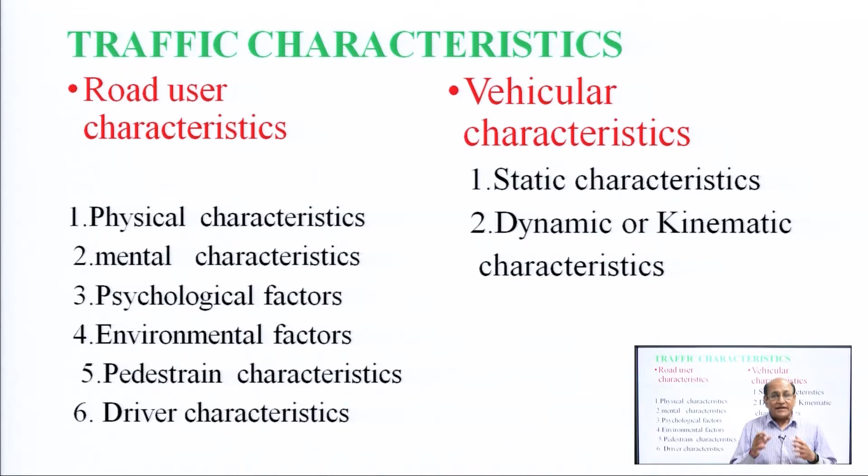In physical characteristic there are two types: one is permanent factors and another is temporary factors.

In permanent factors, the visual factor is important, because if the vision is not so good, it will continue for a longer time if not properly treated. Other permanent factors include hearing, strength, age, judgment and reaction response. Whereas in temporary factors, alcohol, fatigue, illness, anger, climate, season and time are the factors.

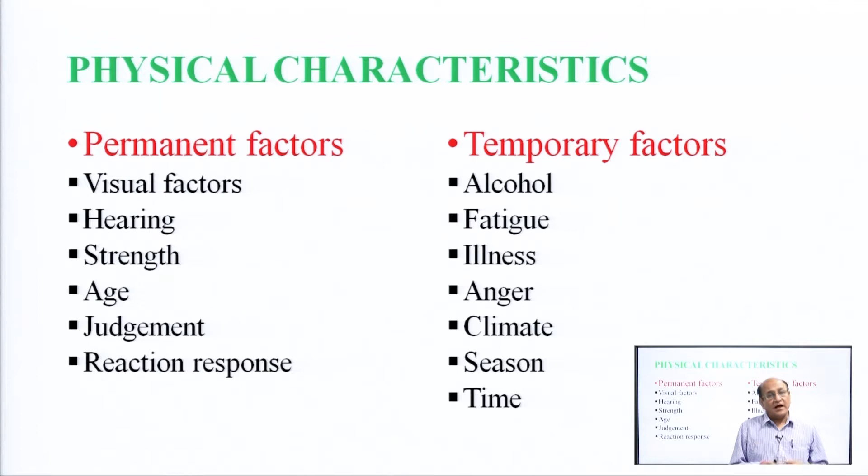So first of all we discuss vision. It affects the ability of the road user to detect objects, receive information and identify objects. This includes visual acuity or clearness of vision, and second is peripheral vision.

So we go through it, up to this is the cone angle of vision. Up to 3 to 5 degrees the vision is very clear, legend can be read within this cone. What is the cone? The cone is like this, you can see here.

Between 5 to 7 degrees the vision is clear and good vision. Then 10 to 12 degrees is satisfactory vision, where object shape and color can be identified. Beyond 12 degrees blur vision starts, meaning we cannot see the object properly, though movement of object can still be detected.

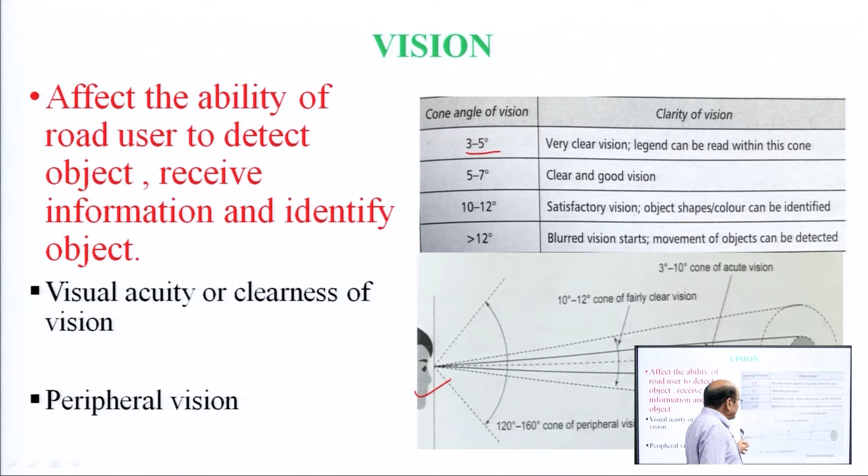Then come to peripheral vision. This is the eye and this is the cone. So we can see here, this is the range of 10 to 12 degree cone, that is fairly clear vision.

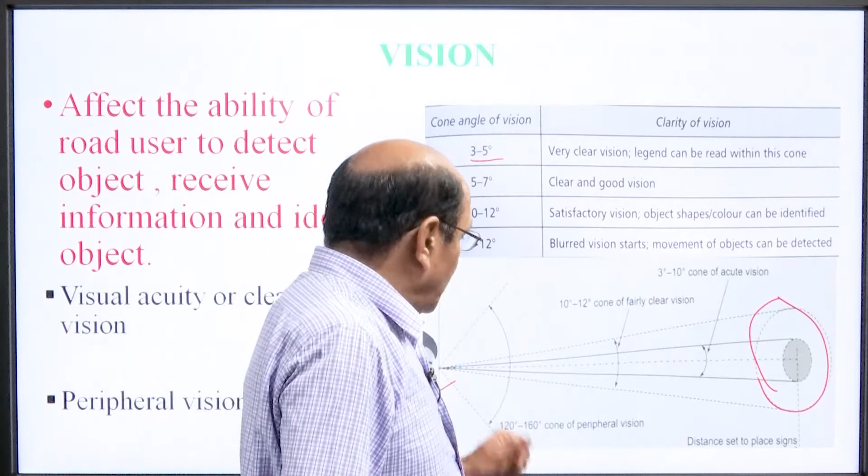This is the 3 to 10 degree cone of acute vision. So up to this, up to 10 to 12 degree cone of fairly clear vision, the object could be quite visible and there will be no problem at all. Beyond that, the problem starts and the object becomes blurred.

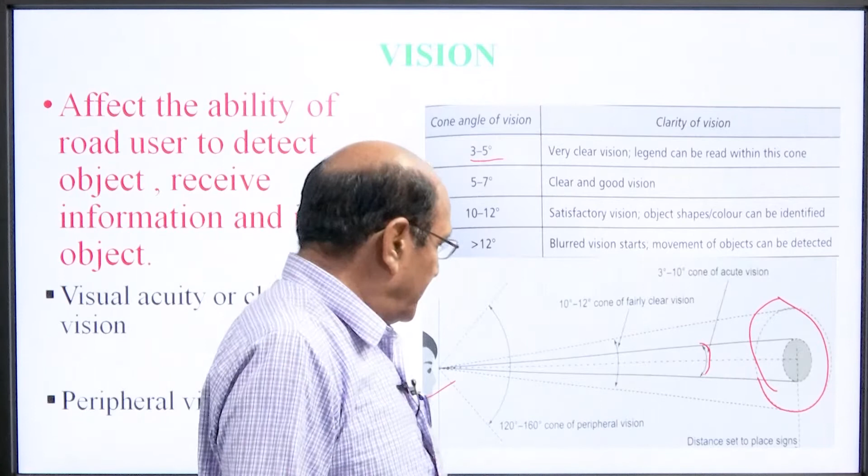So, eye movement and visual concentration, then color vision, glare vision and recovery. Once a vehicle is coming from the opposite side with a strong light, instantly the glare will stop the vision, and within a fraction of a second it is again recovered.

The perception of space means how much distance is there, what is the height - this could be the perception of space.

Hearing, because the rear vehicle will make a horn, so that could be easily heard. Then the vibration sense of touch - once it is touched, then that strength could be perceived.

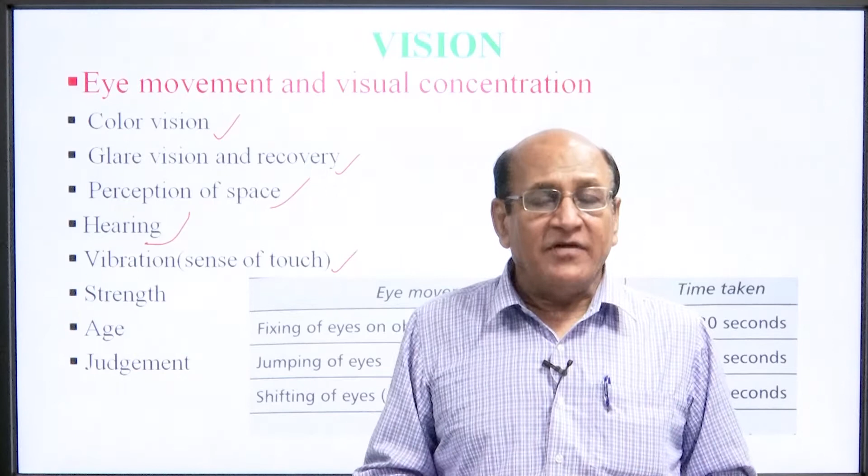Suppose a multi-axle vehicle is driven by a very thin person, he cannot move the vehicle during driving, because he has to work hard to rotate the steering. So strength is one of the important factors for the driver.

Age is also important, but the perception time or reaction time is very fast in the early age, before say 18, and after 50 the reaction time is very large. So age factor is also there, and then judgment.

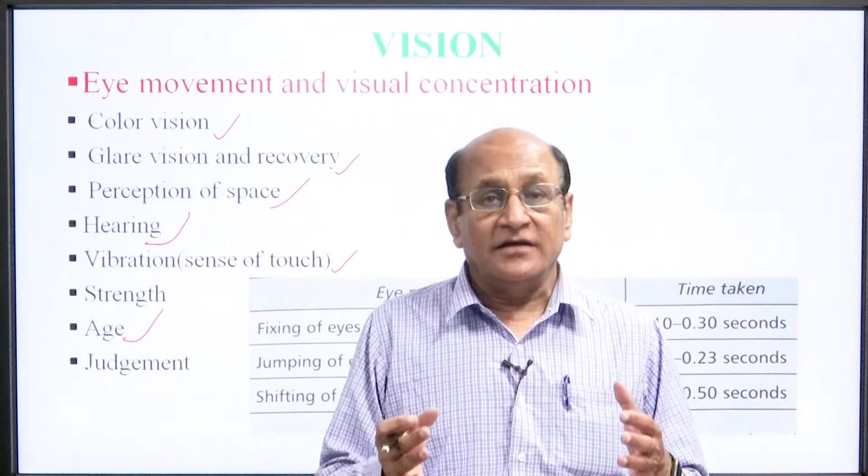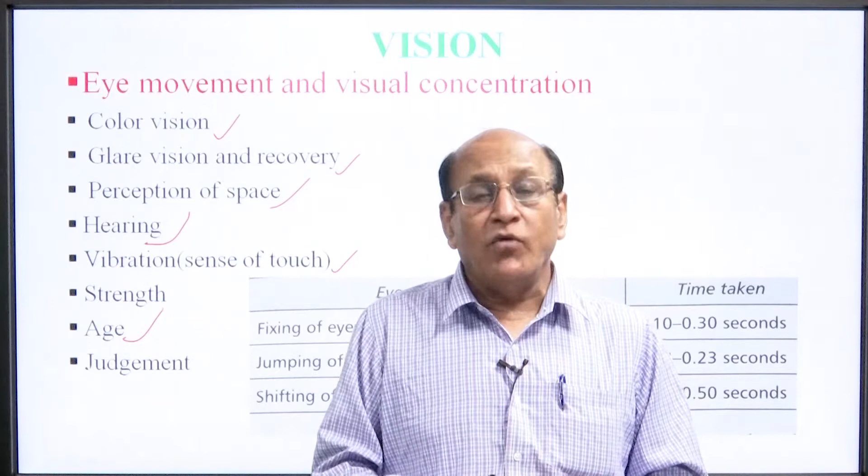This is an important factor with the driver, how he judges the space between two vehicles - he can judge and cross it, he can stop or maintain a regular distance between two vehicles even in the moving state.

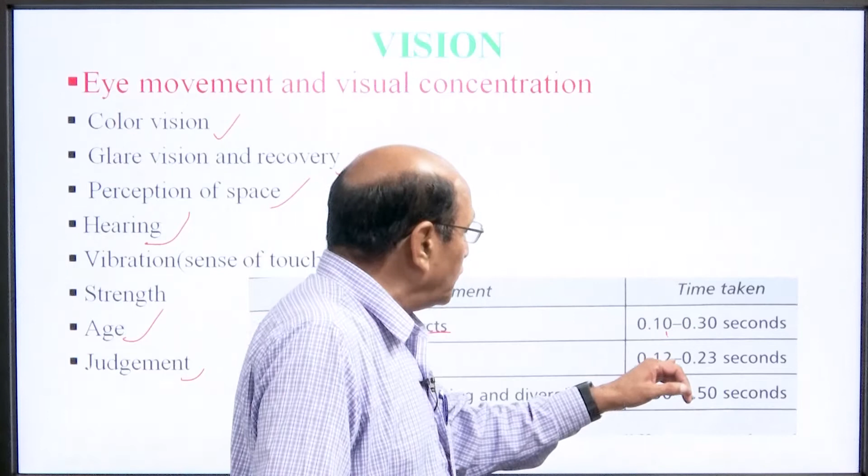Now come to eye movement. Fixing of eyes on an object takes 0.1 to 0.3 seconds. The jumping of eyes takes 0.12 to 0.23 seconds, and shifting of eyes, converging and diverging, takes 0.3 to 0.5 seconds - that is the time required for these.

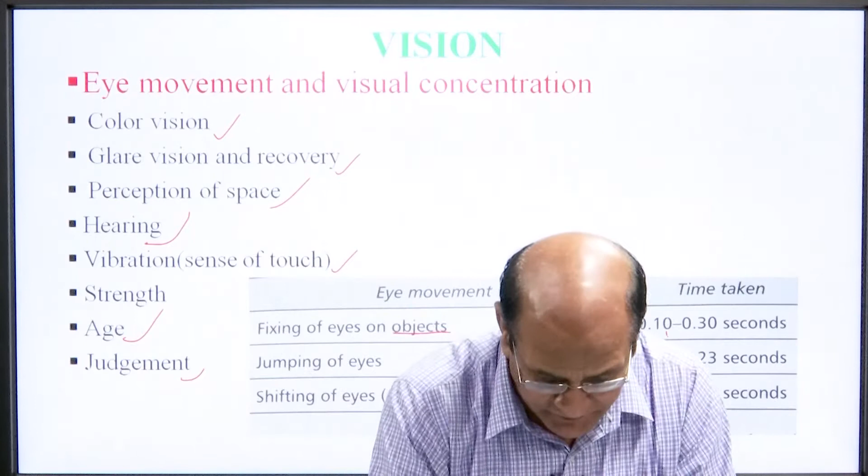Then come to the mental characteristic. Mental means the knowledge of the vehicle and the driving, skills, how is skill, intelligence should be there. So, can he take a decision properly, and literacy means he knows each and everything about the driving.

Then the psychological factors. The psychological factors include attentiveness, fear, anger, superstitious behavior, impatience, maturity, and general attitude towards traffic and regulation.

Driver should be quite attentive while driving a vehicle. Fear - suppose a vehicle, some person or a small boy is just crossing ahead of the vehicle. So he will feel fear, because there are chances of accident.

While crossing, he may get angry as to why the person has done so. Superstitious - suppose a cat is crossing the road, so he will stop the vehicle, and then after a few moments he will start the vehicle again. So this is the superstitious factor.

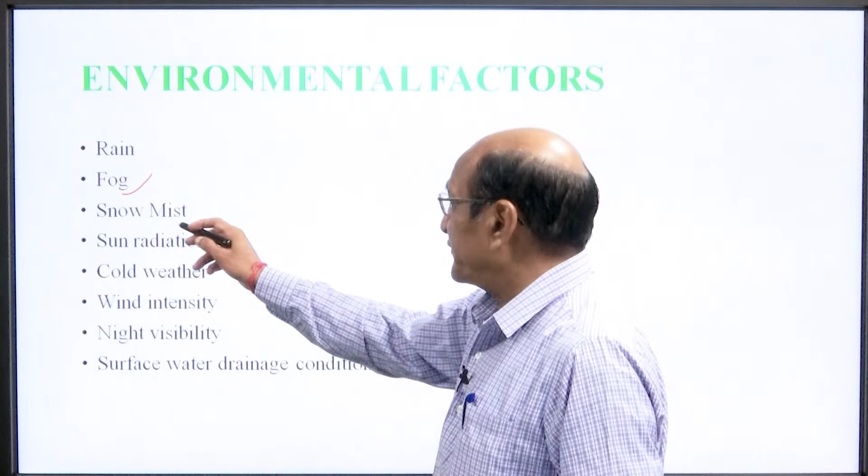Visibility becomes a very small distance. Snow and mist occur in the hilly regions, causing this problem. The sun radiation during the summer season is a predominant factor. Cold weather in the winter, when it is too cold, will also affect the driving.

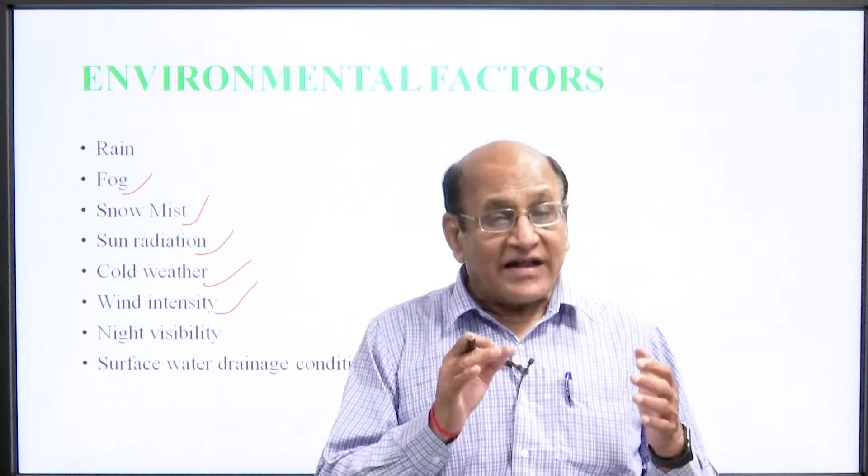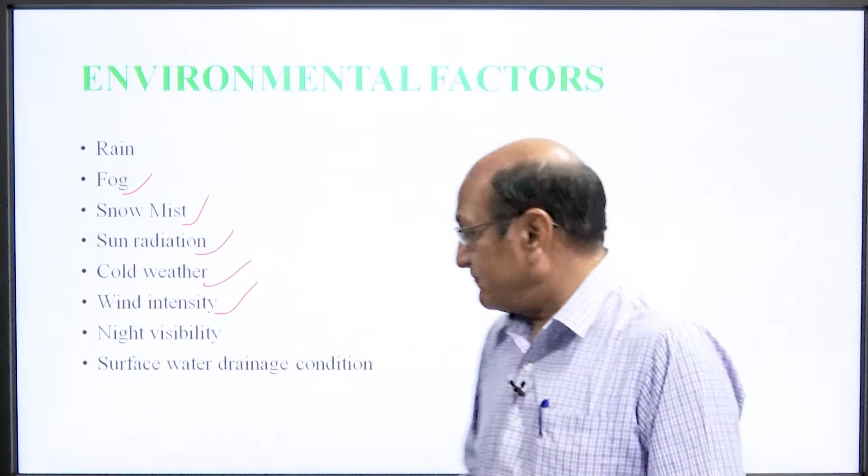Wind intensity - when the driver is driving and the speed of wind is too high, this will affect the driving skill of the driver. Night visibility - some have a problem with night visibility; when driving at night, they feel some difficulty. Surface drainage, the water drainage condition, will also affect the driving of the driver.

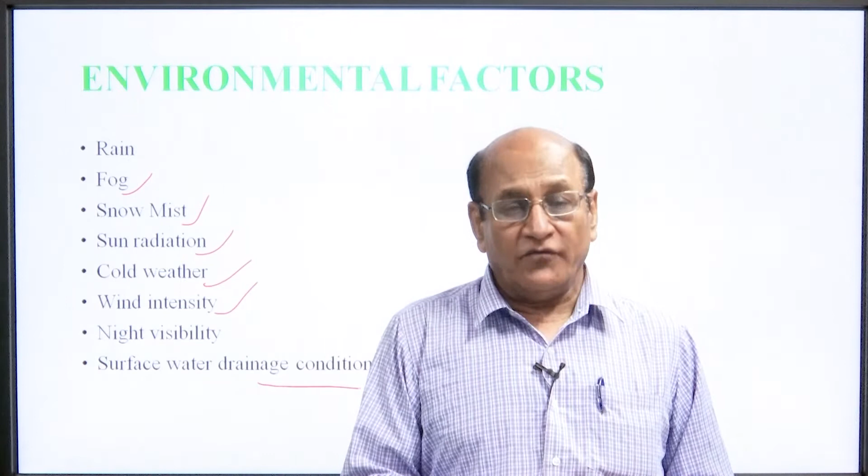Then the pedestrian characteristic. Walking speed is the most critical input parameter in the design of pedestrian crossings at cross sections.

85th percentile of walking speed is used for the design of signal timing at signalized intersections. The gap acceptance and the time gap accepting or rejecting behavior of pedestrians is considered in the design of unsignalized intersections.

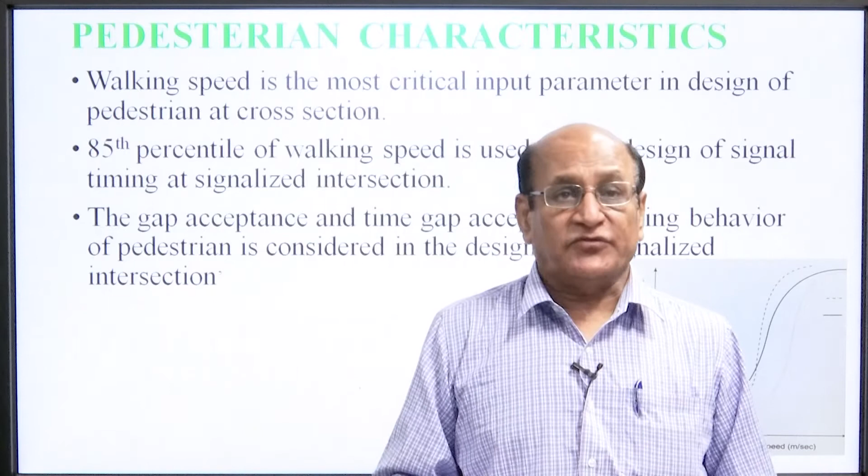So the behavior of pedestrians is quite different, and each person has different views. So it is very difficult to accommodate all these things while studying pedestrian characteristics.

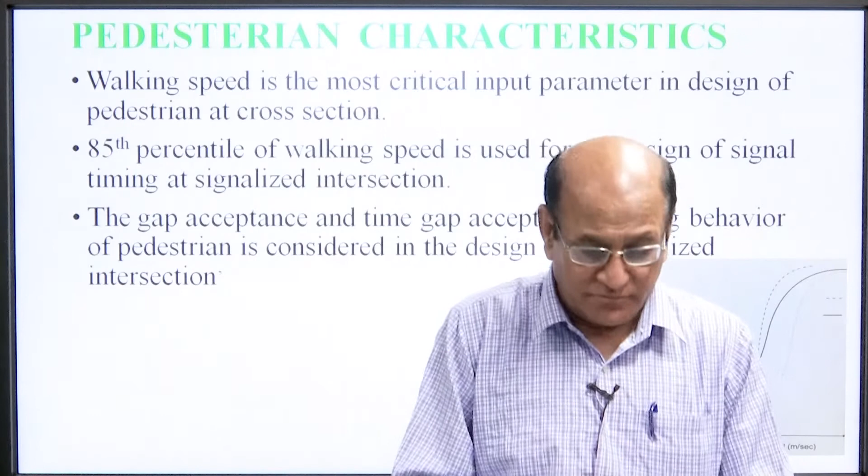So we can see here, this is the cumulative percentage, this is 100%, pedestrian walking speed. Up to 15% there is no problem, but beyond that it will make a hazard while pedestrians are walking. We can see here, this is the line, the cumulative percentage, and it is S shaped.

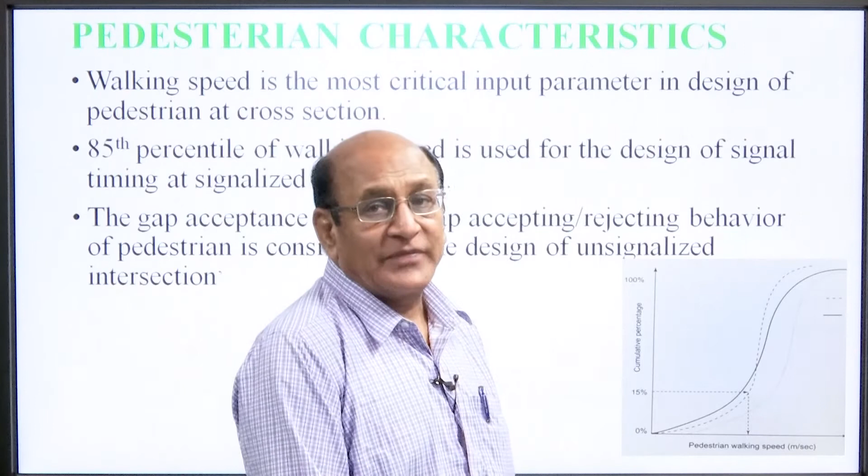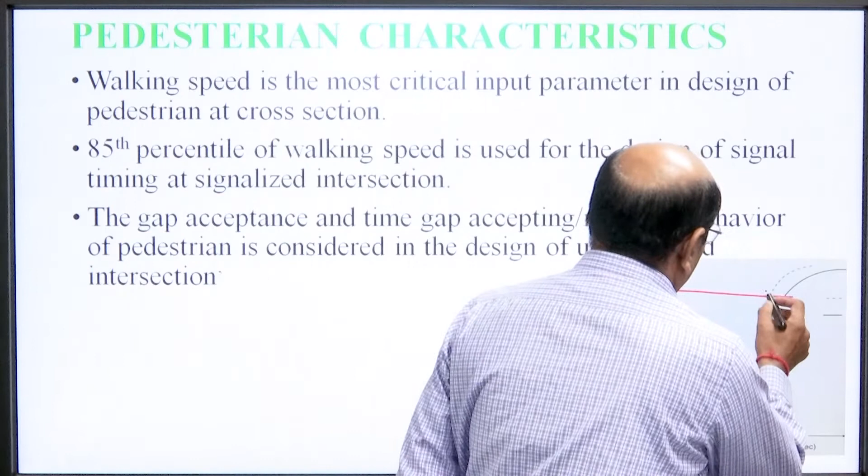So the pedestrian designs or signal designs are made on the 85th percentile speed of the pedestrian.

Pedestrian characteristic - factors affecting the gap acceptance behavior of the pedestrian: speed of approaching vehicle, width of the street, frequency distribution of gaps in the traffic stream, and waiting time, one of the important factors.

Once the pedestrian is going to cross a road, he has to wait some time, and this waiting time is very difficult to bear. So everybody is impatient to just cross it.

Age factor is also important, because small kids below 18 years often have a very small reaction time, so they will cross immediately. Above 50, the reaction time is too long, so they will think and then cross only when there is no traffic on the road.

Second is gender. Gender is also very important for the pedestrian. Males can take a decision immediately, whereas women will think and rethink before crossing.

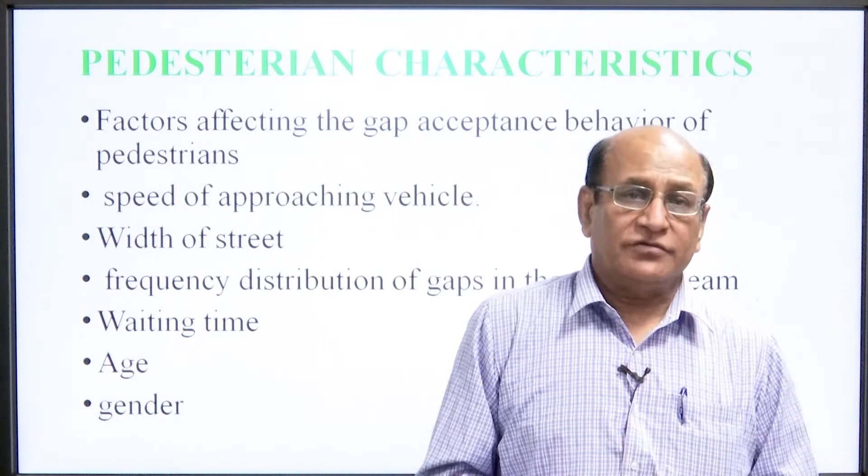So now come to the vehicular characteristic, in which there is a static characteristic. We can see here the maximum dimensions of a vehicle in Indian conditions.

Width - for all vehicles, the total width, the maximum width is 2.5 meters. Height - for a single decked vehicle for normal application, that is 3.8 meters, whereas for a double decked vehicle, that will be 4.75 meters. This is the standard condition of the vehicle in Indian conditions.

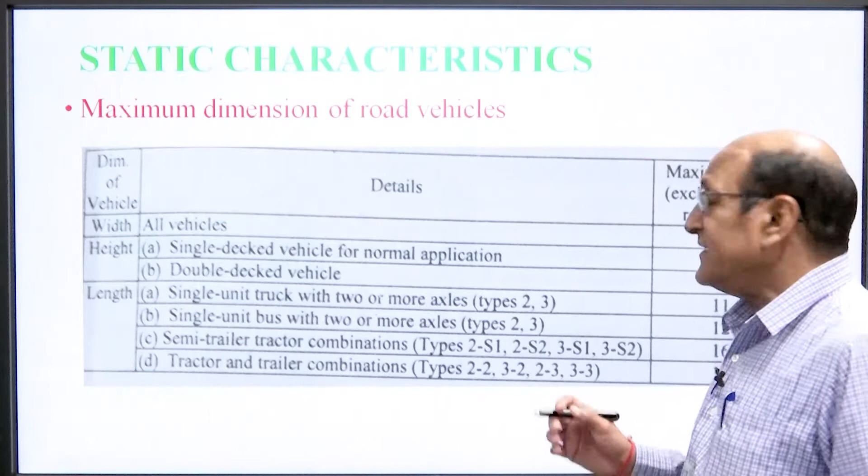The length of the vehicle - the single unit truck with 2 or more axles, that is type 2 or type 3 vehicles.

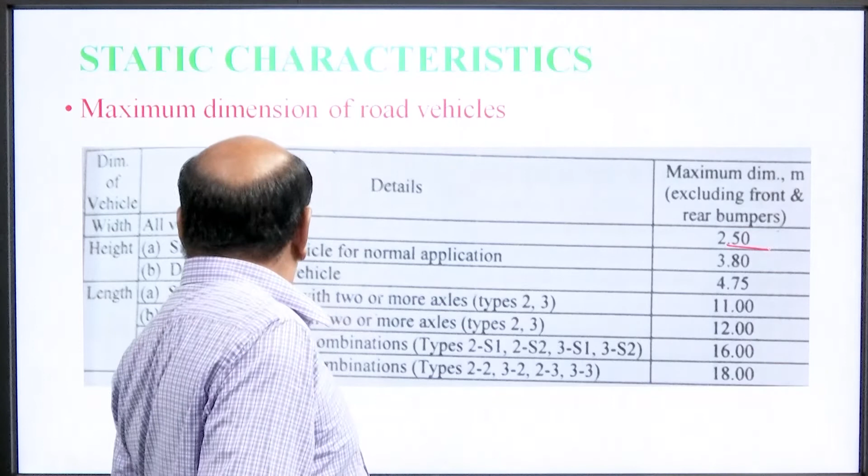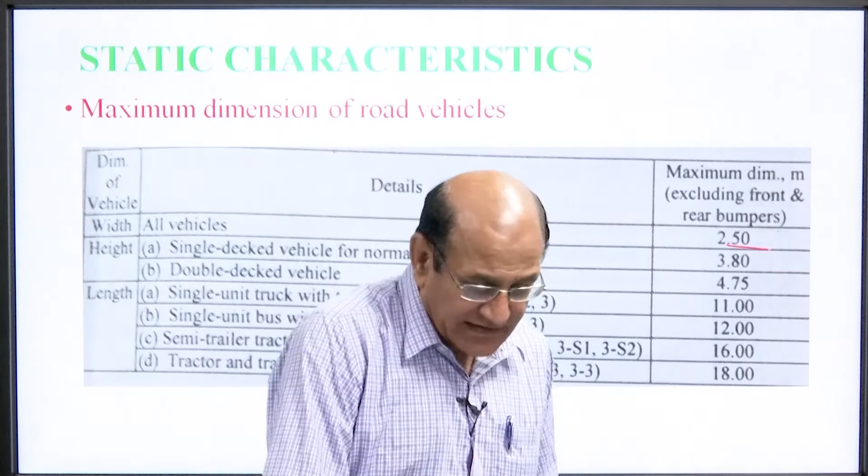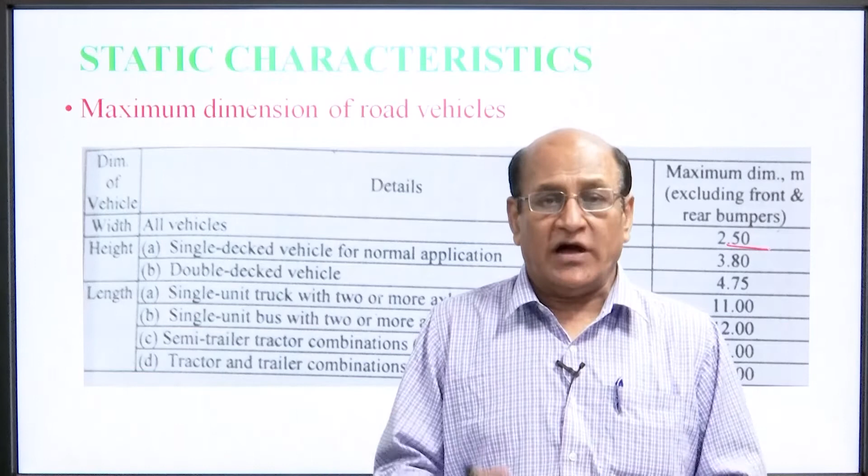So the length will be 11 meters. Then the single unit bus with 2 or more axles, type 2 or 3, that will be 12 meters. Then the semi trailer tractor combination, type 2S1, 2S2, 3S1, 3S2, the length is 16 meters, and the maximum length of a vehicle in Indian conditions, a tractor with trailer combination, type 22, 32, 23, 33, that is 18 meters. So no vehicle can move on the highway having length more than 18 meters. If any vehicle has length more than 18 meters, they have to take separate permission from the competent authority to move on the highway. So this is the static characteristic of vehicles.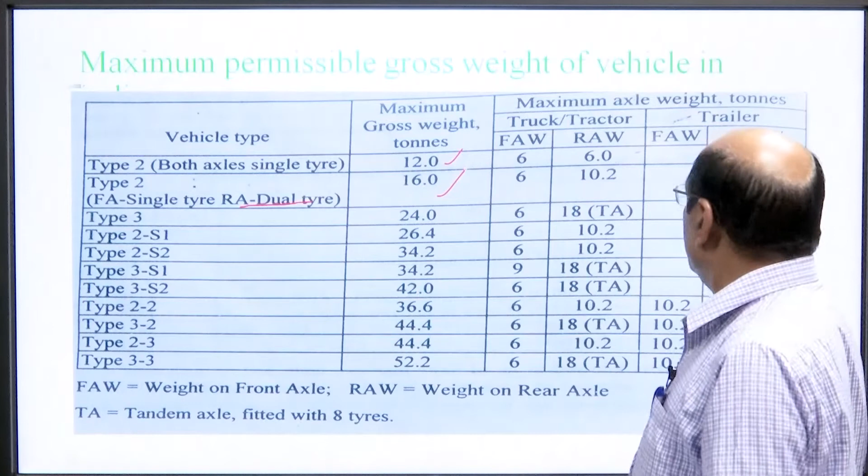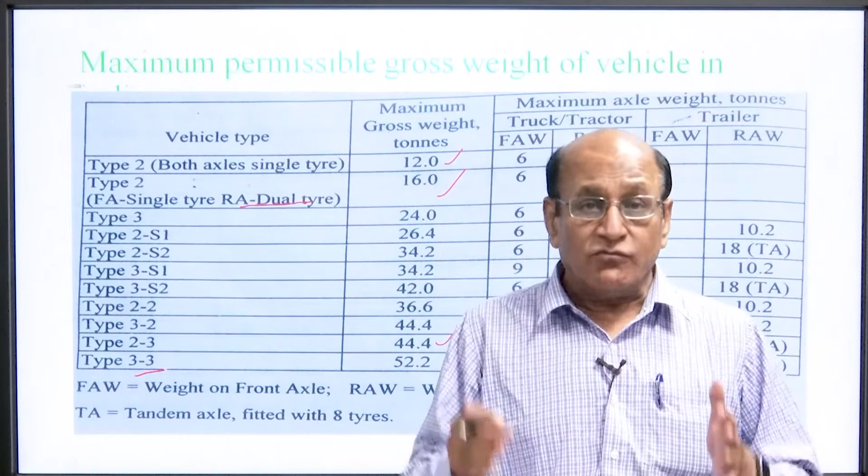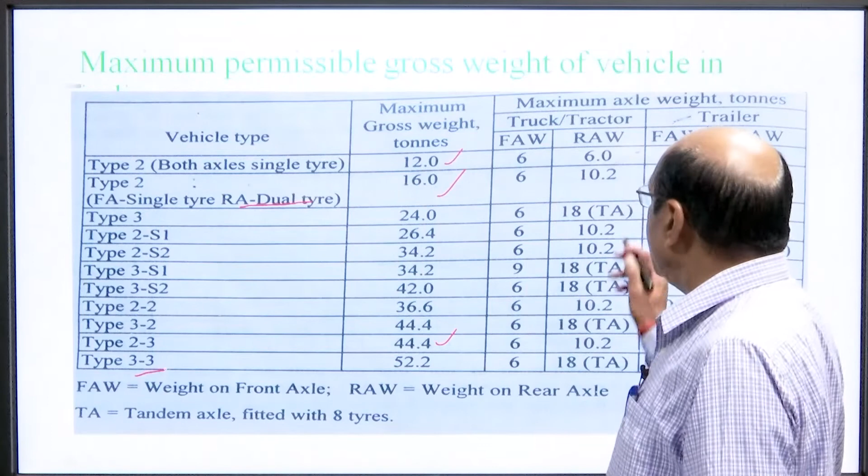So the maximum permissible gross weight of the vehicles. We see here the type 2, both axle single tire, the maximum gross weight is 12 tons. Type 2, front axle single tire, rear axle dual tire, then the maximum gross weight will be 16 tons. Then type 3 have 24 tons, and type 2-3 that will be 44.4 tons. This is the maximum weight a vehicle can carry on the highway, and the maximum weight permitted in Indian conditions for type 3-3 vehicles is 52.2 tons. No vehicle can carry more weight than 52.2 tons, and this is the configuration of the front axle and the rear axle.

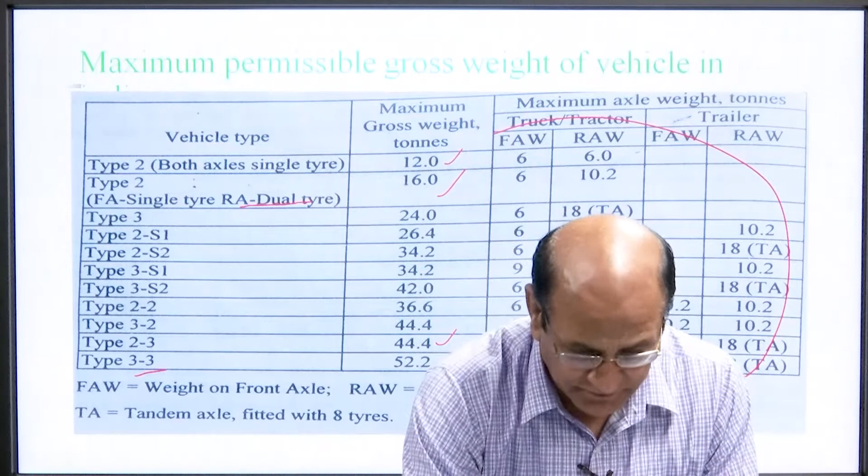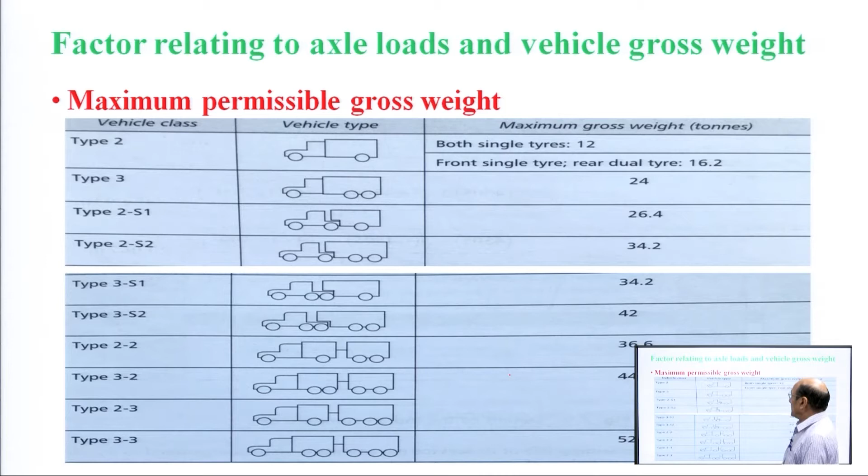So here the factors relating to axle loads and the vehicle gross weight, the maximum permissible gross weight. We can see here, this is the vehicle type, vehicle class, vehicle type, maximum gross weight in tons. So we can see here, this is type 2, front vehicle with 1 axle and there is 1 axle in the rear. So this is type 2 vehicles, both single tire, so the maximum gross weight will be 12 tons. The front axle single tire and rear dual tire, then 16.2 tons.

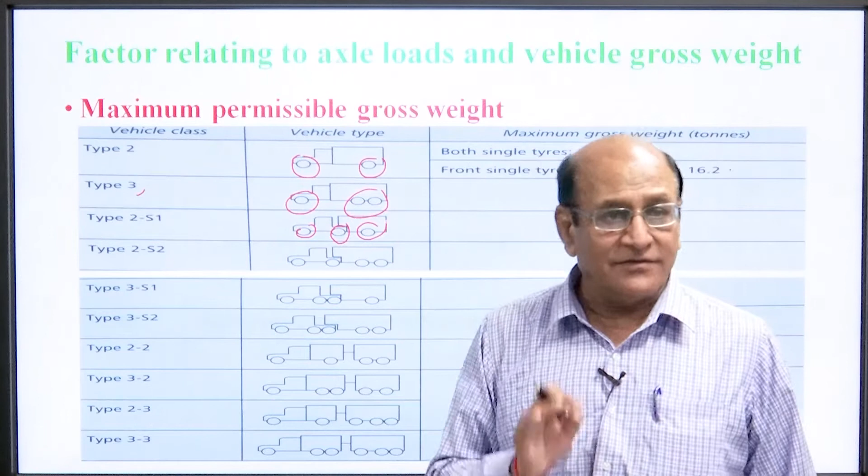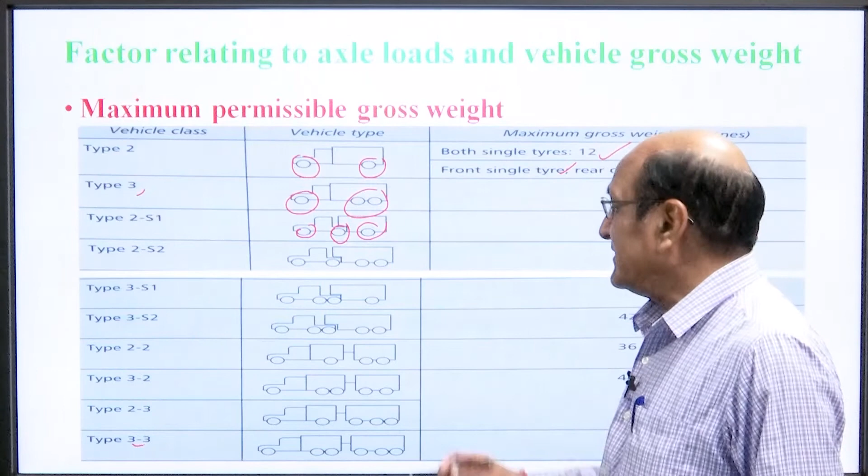Now come to type 3. So the front axle is one axle and rear has two axles. So this is called type 3 vehicles. Now come to the different combinations. This is type 2 S1 - S1 means the trailer having only one axle. So this is the combination of this one. So type 3 vehicles and so on, this is the configuration of different types of vehicles in Indian conditions. So we can say for type 3-3, the maximum gross weight a vehicle can carry will be 52.2 tons.

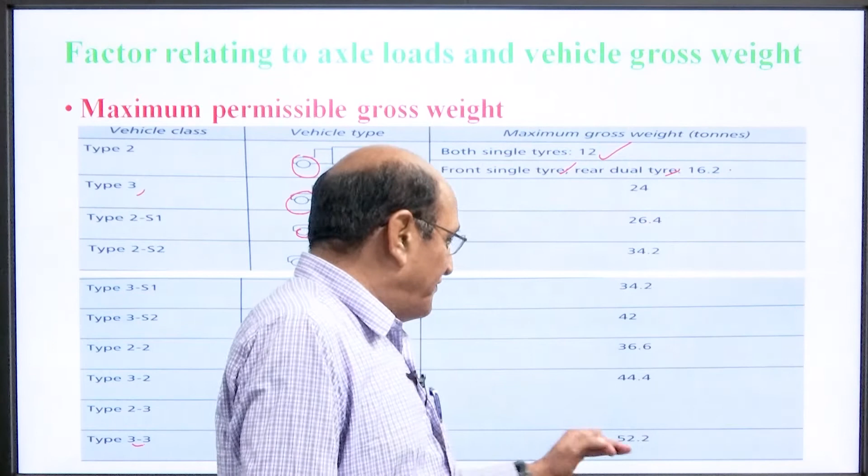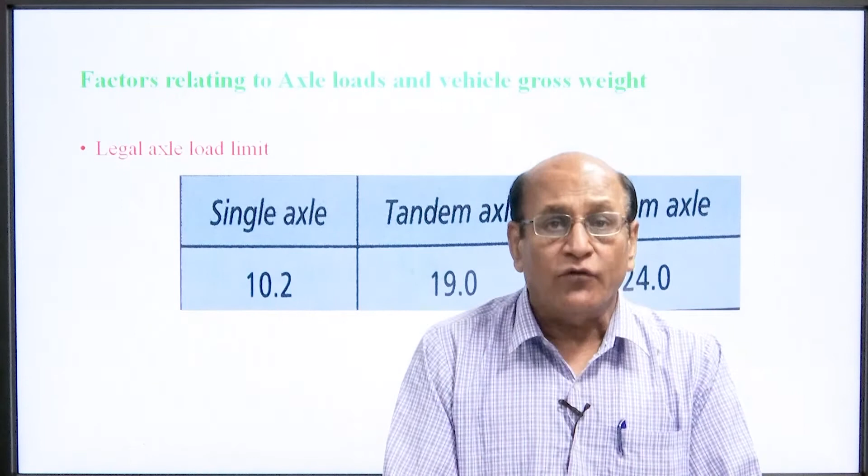Now come to the factors relating to axle load and vehicle gross weight. The single axle has 10.2, tandem axle 19.0, and tridem axle 24. This is the load limit.

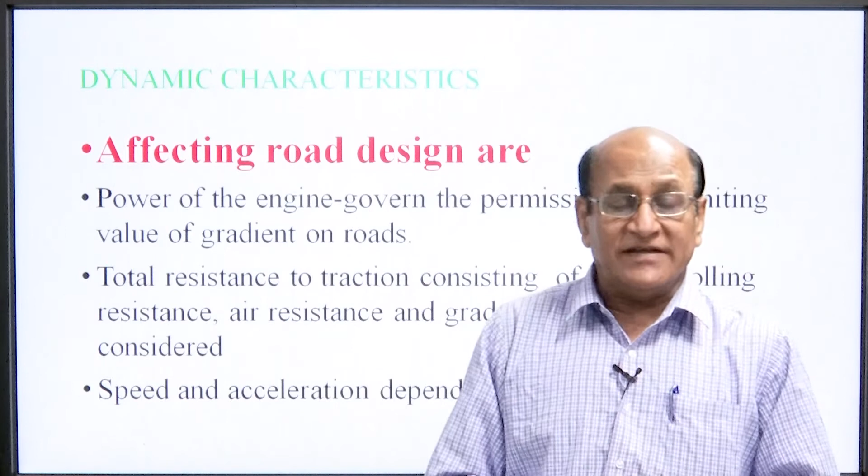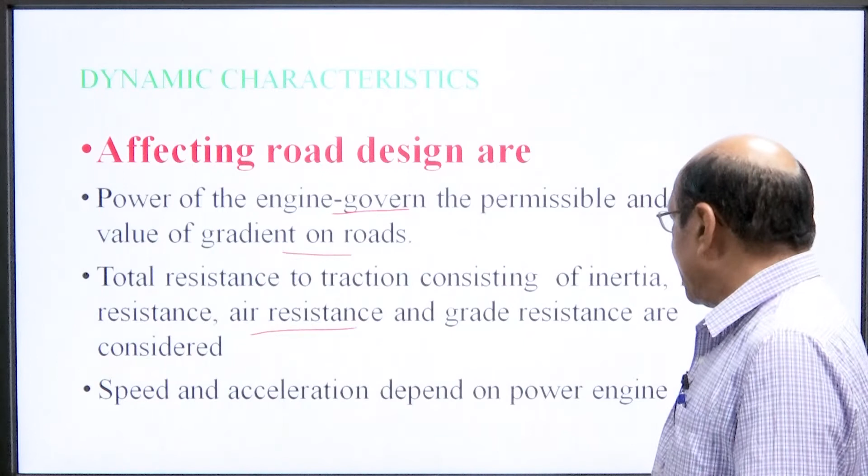Now come to the dynamic characteristics of the vehicles, meaning in moving conditions. The factors affecting road design are power of the engine governing, the permissible and limiting value of gradient of the road, the total resistance to traction consisting of inertia, rolling resistance, air resistance, and grade resistance, all considered, along with speed and acceleration based on engine power.

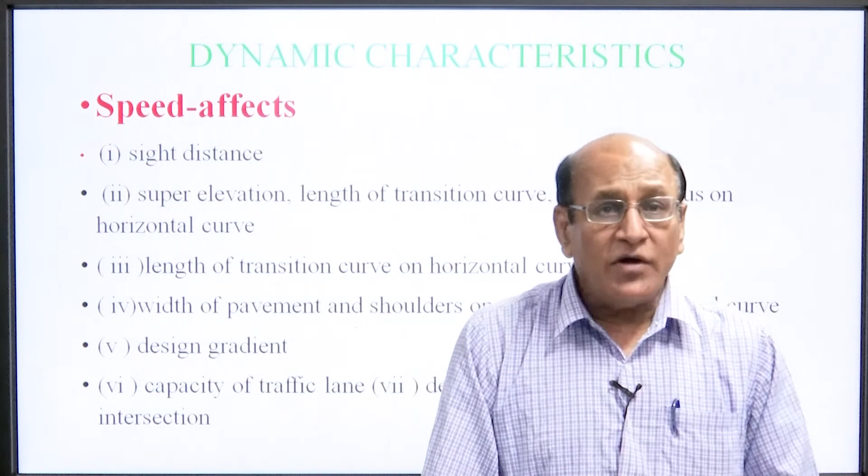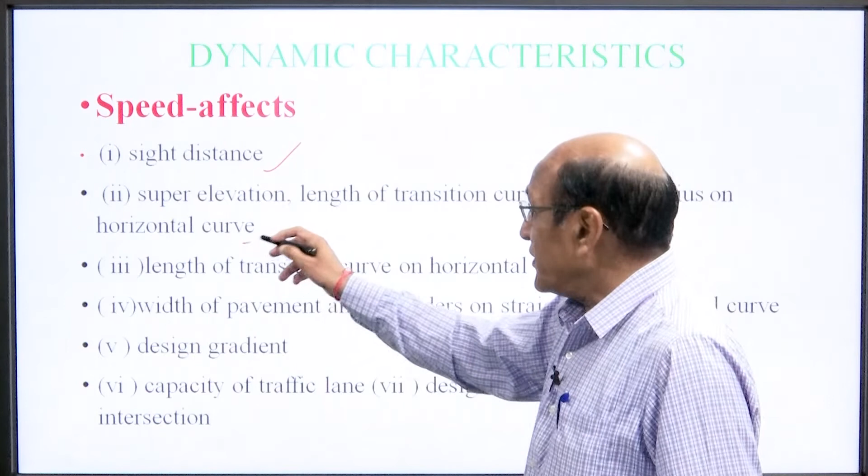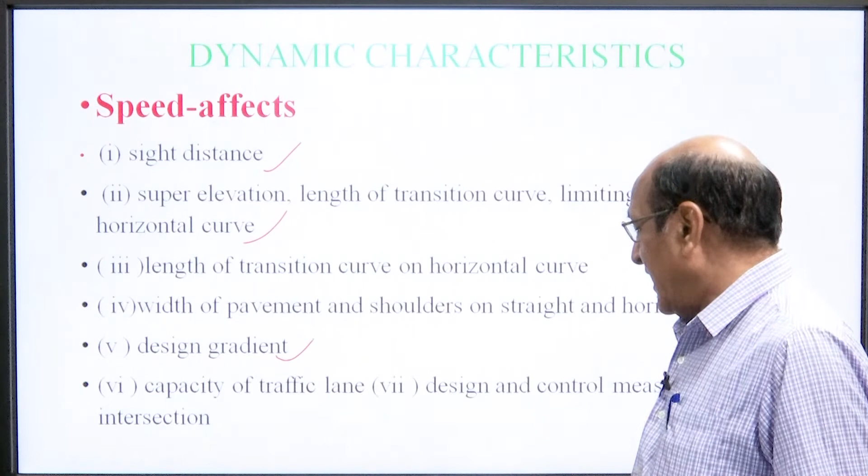Now the speed effect - what are the effects on dynamic characteristics? Speed effect: sight distance, this will decide the sight distance, super elevation, length of transition curve, limiting radius on horizontal curves, and it may include the length of transition curve on horizontal curves, width of pavement and shoulder on straight and horizontal curves, the design gradient, the capacity of traffic lane, and lastly, design and control measures at intersections.

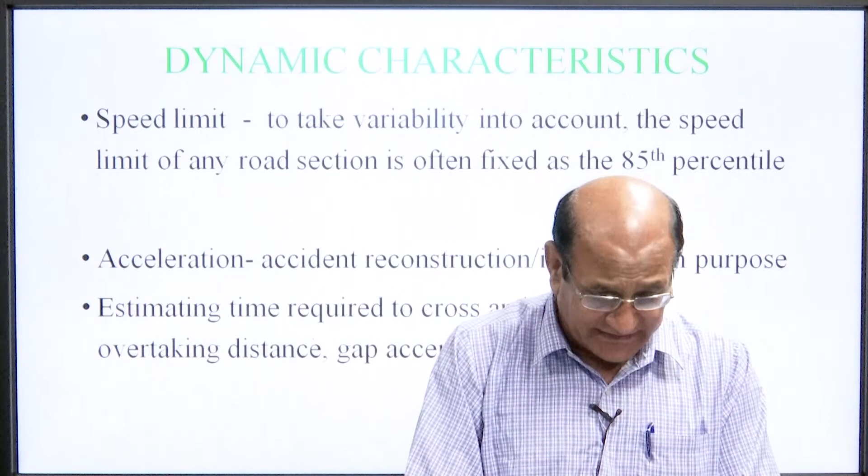Then the speed limit. To take variability into account, the speed limit of any road section is often fixed as the 85th percentile of speed. The acceleration is used for accident reconstruction or investigation purposes, estimating time required to cross at an intersection, overtaking distance, and gap acceptance. So these are the dynamic characteristics of the vehicles.

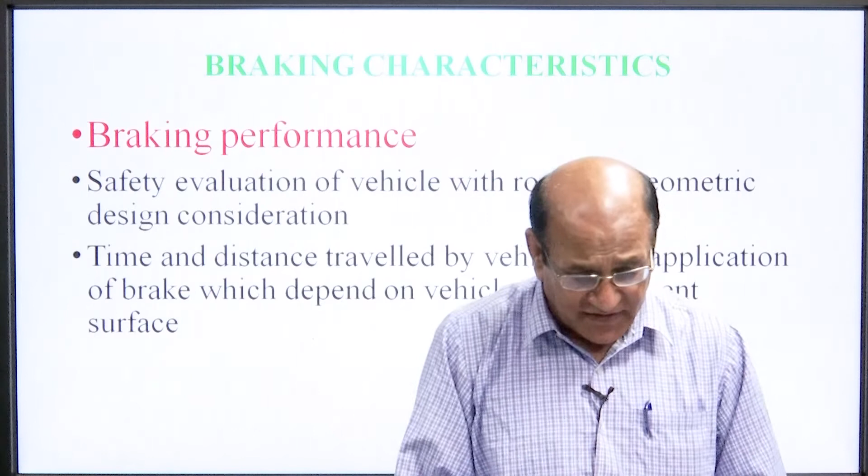The braking characteristic, because brake is very important in a vehicle. This is, I can say, the control of the vehicle in the hands of the driver. So this is used for safety evaluation of the vehicle with roadway geometric design considerations. Time and distance travelled by the vehicle after application of the brake depends on the vehicle and the pavement surface. The vehicle performance will very much depend upon the braking system of the vehicle, and this will develop confidence in the driver. So brake is a very important factor for a vehicle, and that is the control point of the driver.